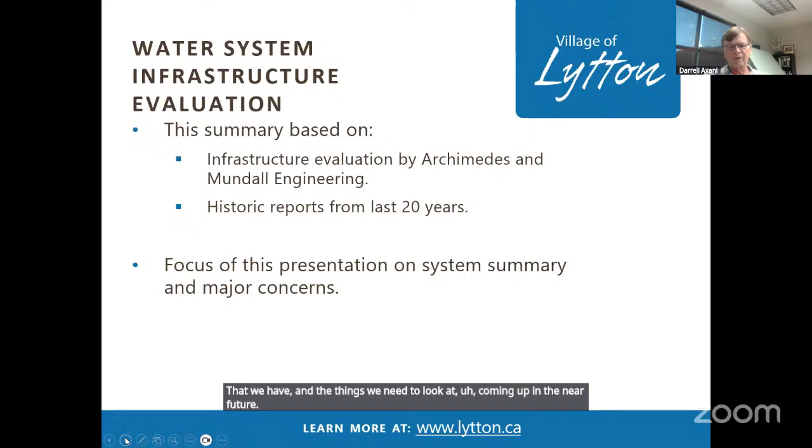Lisa, next slide please. Okay, have we lost Daryl? No, it's just... yeah, there you are. Sorry, I was just waiting to see if there's any questions or anything.

So over the last 20 years, there's been a number of reports. Walking back a little bit in history, around 2008 or so, there was some work done on looking at new sources of wells. So McElhanney was involved, and there were two new wells drilled. We called them wells 2 and well 3. They did an evaluation of how they should be connected to the system.

Following that, there was an Opus Water Capital Plan that was completed in 2016, and they did a comprehensive look at the entire village system. Over the years, there's been quite a number of reports by Golder and Associates. They've done a number of source water protection plans, wellhead protection plans, and a fair bit of analysis on some of the wells over history.

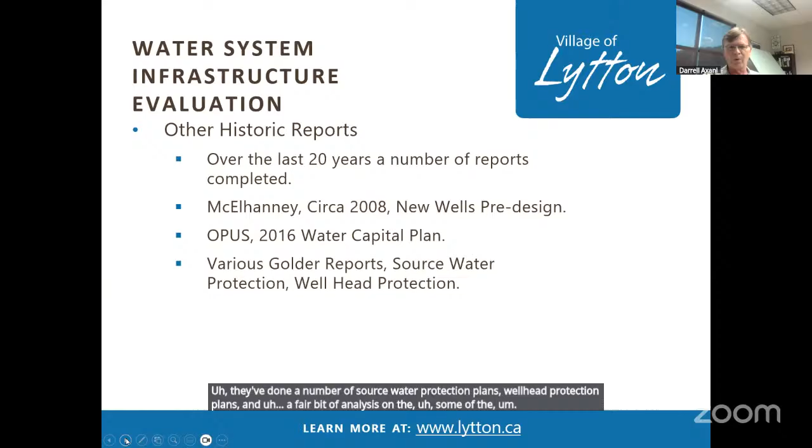Next slide please, thank you. So at a high level, a water system typically includes supply, and that's usually wells or surface water, or both in our case.

There's a water treatment component, and that's to a 4-3-2-1-0 criteria. That's an Interior Health criteria. I think Kevin Vilak had talked a little bit about this in the June presentation. So there's a 4-log requirement, that's the 4-log reduction for bacteria and viruses. Just to give you a bit of context of what that means in terms of 4-log, it means 99.99%. A 3-log reduction then is 99.9%, so that gives you a bit of context of what that actually means.

So the 3 component, that's a 3-log reduction in Giardia and crypto. The 2 represents having at least 2 barriers for treatment, so in our case we have chlorination and UV. The 1 stands for having no more than 1 NTU of turbidity in the system. And the 0 is for 0 coliform, so no fecal coliforms in the system.

The next component is water storage, and the water storage provides capacity for your domestic use and for fire storage. And lastly, the water distribution system, so that's all the pipes, now with the treated water, it transfers the water from the reservoirs to the point of use at your tap.

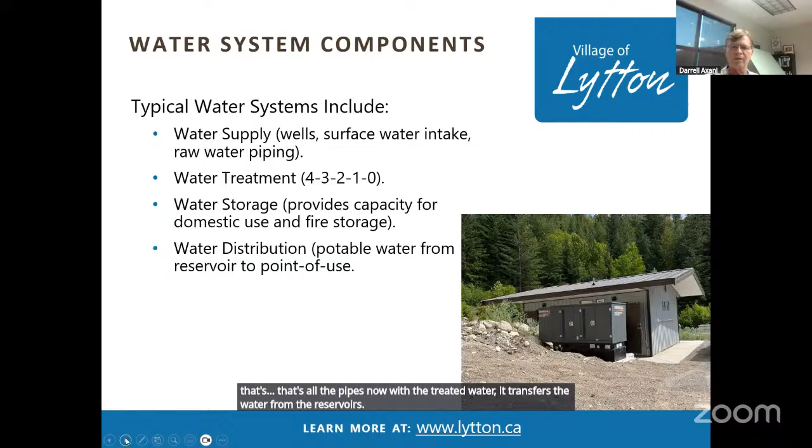So in terms of the Lytton system, we're fortunate because we have the Lytton Creek intake, and we have 3 wells. We have 2 active wells, 2 and 3, and a well number 1, which I'll talk about in a following slide. That well is currently not active. There's raw water piping from the supply, so wells 2 and 3 pump through a raw water supply up near the intake to our treatment plant, and from there it's treated and goes to our storage facilities.

There is a multi-barrier treatment system, so we currently have UV and chlorination. We have 4 reservoirs, two in each pressure zone, which I'll talk about shortly, and we have 2 pressure zones, which I'll also talk about in a following slide. Finally, we've got about 9 kilometers of distribution piping once the water comes from the reservoirs to your tap.

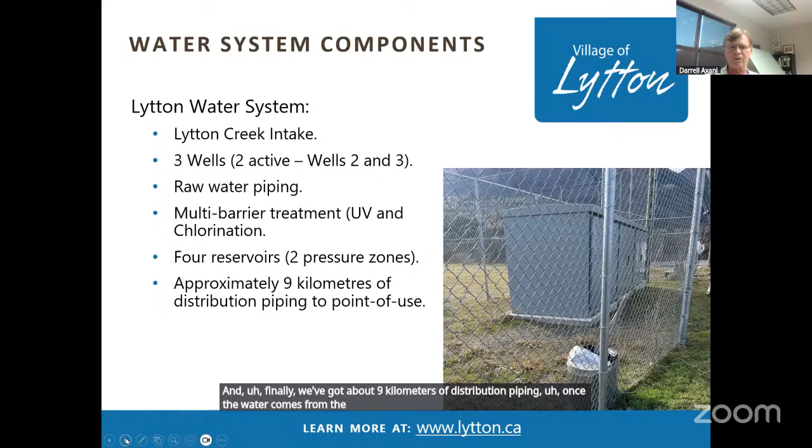Next slide, please. So some general terminology, just so you have a context when I'm going through this. ADD represents the average day demand, which is basically your yearly total water usage divided by the number of days. It can be further distinguished per person for design purposes, so you can use it in some of your design evaluation. MDD stands for maximum day demand, and it's a key design parameter in sizing your wells and sizing your storage facilities.

Again, for water treatment, we follow the 4-3-2-1-0 protocol. Water storage provides capacity for domestic use and fire storage, and there's also a contingency allowance on top of those 2 components. The water distribution is then transferred from the water storage reservoirs to the point of use.

In terms of the reservoirs, you may have heard the terminology — we call them the zones in the village. The 265 zone, we call it the 265 reservoir, and the 345 reservoir. What that really means is the design top of water is at 265 meters for the 265 zone, which controls the pressure down in the lower village. The 345 is the top of water in the upper reservoirs, and that controls the pressure in the upper zone, which services Loring Way, the motel, and the school.

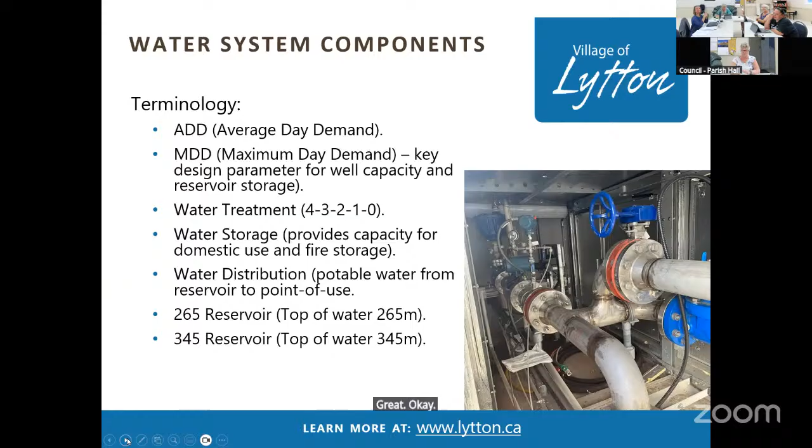Okay, we'll carry on then. Thank you.

So in terms of our supply, yes, we have the Lytton Creek intake, which has been active for quite a number of years, and we have the 3 wells. Well 1, we're currently requesting an assessment, we've submitted an RFP to 2 hydrogeologists. We would like to get an assessment looking at the options to bring that possibly back online and connect either in the 265 zone or pump up to the 345 zone.

We've also nearly completed, earlier I think it was February, March, we submitted an RFP to do an impound assessment. Staff had some concerns with the integrity of the impound and storage, and the operational issues in terms of cleaning and such. So that report we're expecting any day now.

So in terms of our water supply, we need one more well at some time in the near future. So well 1 could serve as that additional supply source. In the terms of reference for the hydrogeologist, I've also asked for a desktop assessment to look at alternate locations where we could drill a well and get some cost estimates for what that may entail.

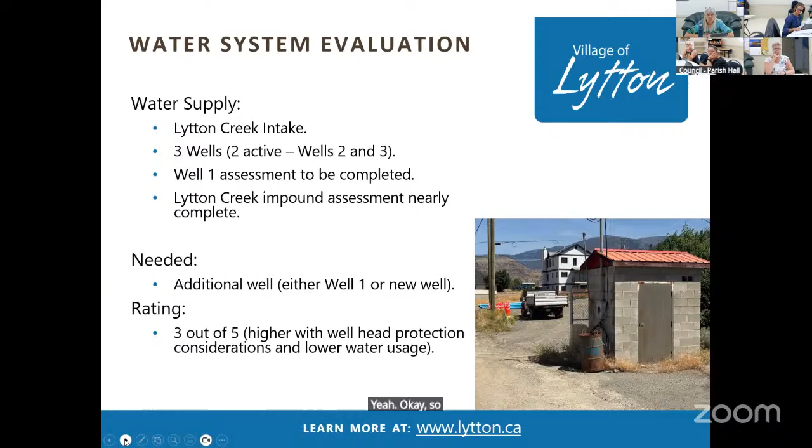Any questions? Okay, so is that the end of your presentation right now, or do you have more? Oh, no, that's just, oh yeah, okay, we're just getting going. Yeah, we'll keep going, but I don't know if there's any questions from that slide. Yeah, doesn't look like it, no.

Okay, so for the history of the water supply, many of you probably know that historically Lytton has used surface water supply for quite some time, and that's going back, I think, pre-1990. Typically it was only surface water supply.

So about 1991, well number 1 was drilled, and that well pumped directly into the local zone for the village in the lower area, what we now call the 265 pressure zone.

Wells 2 and 3 were drilled around 2008, and they were connected in 2018. Well number 1 is currently inactive, and as I mentioned, we're doing an assessment on that. We should have both proposals to evaluate here and have a recommendation to council fairly shortly.

We've also have the Lytton Creek impound assessment, and that will be completed fairly soon.

So in terms of our water treatment system, as I mentioned, we have UV disinfection and chlorination, and it's regularly checked by trained operators. One of the things, and I've had discussions with Interior Health, they would like us to add a filtration system, and that's primarily due to the fact that we run on a surface water system. The key concern is if we provide filtration, that'll give us a bit more resiliency, and we can use the Lytton Creek system a little bit more over the year, particularly during freshet in the spring. So once we've got that in place, then we have to rely less on the well pumping system.

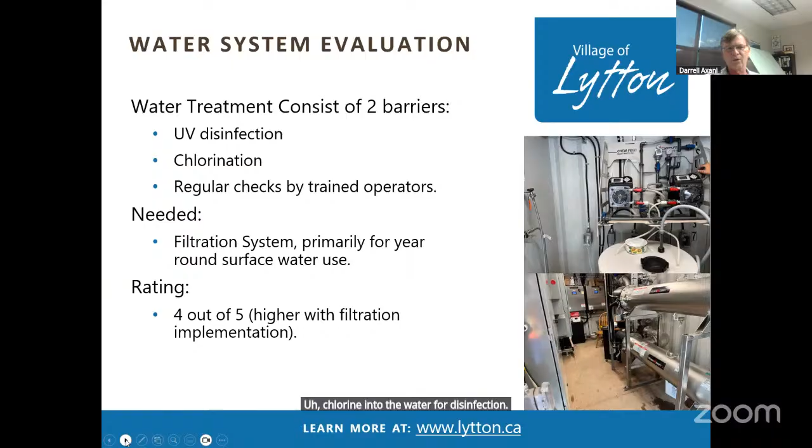For water storage, our water is stored in a 265 zone reservoir with 2 cells, with a capacity of 360 cubic meters. We also have the 345 zone, which has a total of 925 cubic meters. The total approximate storage is around 1,300 cubic meters. The inset photo is just outside the treatment building, and if you look just over the bank, you can see some lids and hatches — those are the reservoirs.

In terms of reservoir capacity, we size the reservoirs for domestic use by people and for fire flow capacity. One note on firefighting needs, which we can discuss further later, is that this doesn't factor in interface firefighting needs. So one component we may want to look at in the future is additional storage. But generally, in terms of rating, the structures are in good condition and fairly new.

There's some issues and reports suggesting we could use a bit more storage. There's more work required on that because another factor is that if we implement fire sprinkler systems in buildings, under a fire underwriters setup, we can actually reduce the load of hydrant fire flows, which would moderate our storage requirements a bit as well. So there's still some things to look at in the background, but the storage is in reasonably good condition.

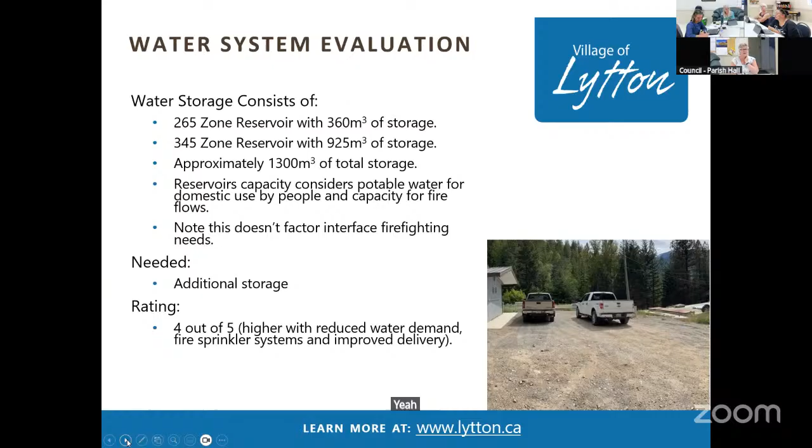Well, if we're going to rely fully just on hydrant fire protection, we would want more storage. I think the Opus report defined that as an additional, I think it was 400 cubic meters. So not a massive amount, but you still have to go through the motions of doing all the design work for a new tank and finding a location to put it. The likely location, if there's space, would be up at the high zone, because that would also feed the 265 zone — you'd kind of kill two birds with one stone. Okay, thanks Joe. You're welcome.

In terms of water distribution, we have about 9 kilometers of pipe, so a fair bit of pipe. It ranges in size from 50 millimeters to 200 millimeters. Our current bylaw requires a minimum size water main of 150 millimeters. I think that bylaw was written in the late 90s, and it's still relatively current. For firefighting, typically we want a minimum of 150, preferably 200 millimeters; if you have very large flows, you may need more.

Typically your main feeds from your reservoir are where you're going to want the biggest lines, and that's some of what we'll have to look at in the near future in terms of where we allocate grant funding and so forth.

Many lines are very old, I'm thinking 50 years or more, galvanized iron. They're currently east of Main. We're replacing a number of lines that were poorly installed, lines that weren't actually supposed to be put in for municipal mains in streets. So fortunately now we're getting some of that out of the street and putting in proper mains, basically 150 millimeter mains as a minimum size.

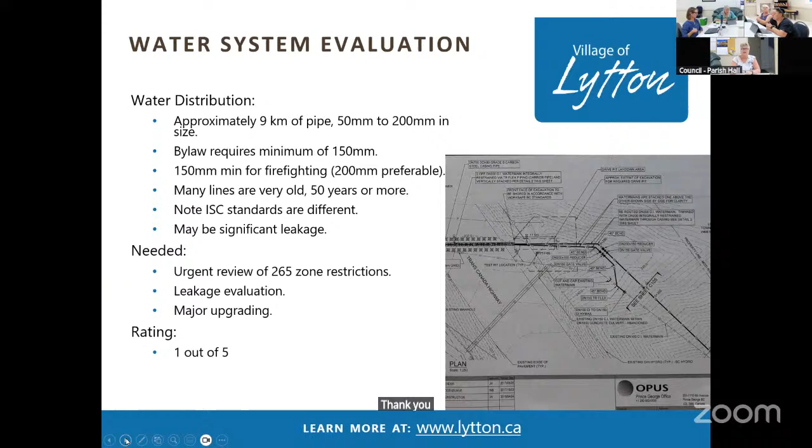Thank you. You're welcome. Okay, we'll carry on then, Darrell.

Okay, so here's where we get into the water demand. I did a quick summary and looked back through some of the older reports, talking about what average day demand is and max day demand.

MDD is used in design for water systems as a key criteria. Looking at the design criteria, about 20 years ago the City of Kamloops implemented water meters, and I think their numbers were a little bit higher than they are now. I've recently come across information that with metering, they dropped about 50% in usage.

But looking through over the years, you can see the McElhanney report. In the pre-design report, McElhanney reported two periods of time, one in 2008 and one in 2005. I assume the population was about the same since it's been fairly flat for some time in terms of growth. In 2005, the average day demand was about 2,700 liters per person per day, and the maximum day demand was 5,200, and 5,100 for 2008.

In terms of max day demand, I don't think I mentioned that, but it essentially means the maximum amount of water you're using, say on the hottest day of the year when everyone's irrigating. So if you get a bunch of years and find the most water used in any one day, that's your maximum day demand. Over a number of years, you'd take the highest number - that represents your highest water use for one day.

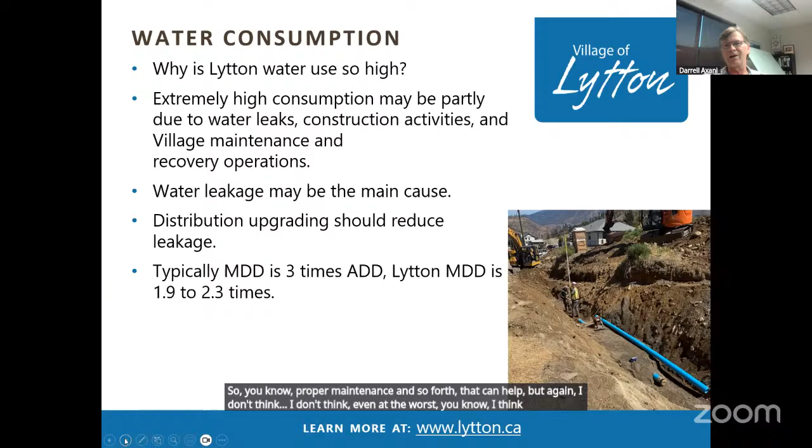And as Councillor Toss said, I don't think people are wasting water in the village personally - I think they're fairly reasonable in their usage. There was a note at the last presentation in June: if somebody leaves a garden hose running, that's fairly significant, or if you have leaky toilets, that can be significant too. So proper maintenance and so forth can help. But even at the worst, I think it might be 1,000 per person - I think we should be much lower.

Additionally, not all properties have lawn at this point or plants, so there's nothing to water. A couple of the inset photos from the last two - that's actually the current water main construction going on east of Main. You're looking at the photo there now, that's 5th Street, and the previous one was Alonzo Way.

In terms of priorities, especially since we have a contractor in town now, we'd like to investigate what's going on at the 265 reservoir. It looks like we may have a line that we should increase in size. On Monday we walked around with the contractor and looked at it. I went out with Jim Rowe and we investigated the site and located all the valves on the system.

I think we'd probably do a two-stage approach. The first stage would be to get a survey of the area, survey all the valves, get some topographic information, then have the contractor do some test pits so we can see what's in the ground. There's also some old infrastructure, like an old PRV chamber that was never really fully decommissioned.

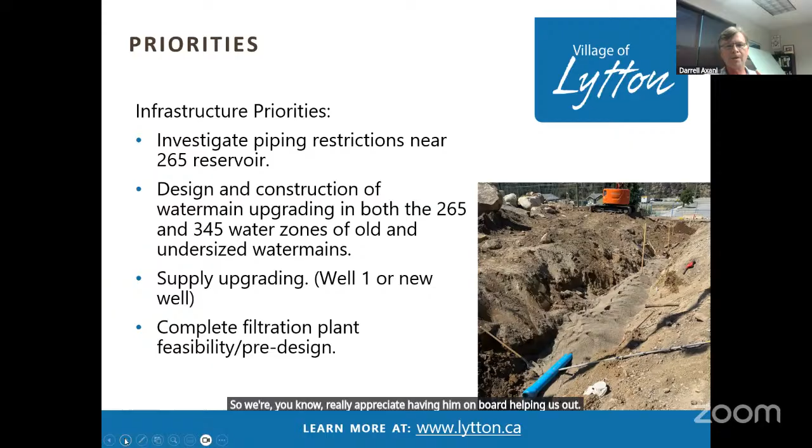Other priorities: fire. Assessing building fire risk, including fire sprinkler systems. I don't think fire sprinkler systems are something that's really been done a lot in Lytton. I've heard that possibly some of the Kent Road area and the school may have fire sprinklers in the building.

They are useful. You've got to think if a fire starts inside a building, it will address it. One of the concerns I have in Lytton is you get those winds, so any source of ignition with those winds can be hazardous. So if a building starts on fire, fire sprinkler systems will address that risk.

It also reduces the amount of water you may need to pump at your hydrant or flow at your hydrant. There are credits if you run through what's called the Fire Underwriter Survey ISO calculations. You can get various credits and reductions on the amount of fire flow you have to run and what capacity you have to use.

There's also, I think, a larger community conversation here. Dan Mendel had brought this up in terms of interface fires. How do you address those? Is there an economic way of doing it? It's worth a conversation to have in the community, also looking at fire-resistant building techniques. How can we do better? What can we do about landscaping? How can we make landscaping more resistant to fires? I think there's a larger conversation there because some of the costs may be cost prohibitive. So I think you really have to think outside the box and have a good conversation about it.